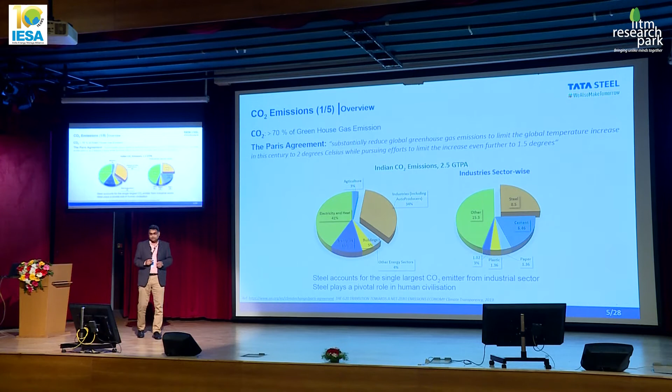So coming to the CO2 emissions, overall perspective, why it is important for the steel industry and what we are doing. Let us concentrate on this part. Overall emission from different sectors, if we see, the industrial sector is contributing 34%. Steel alone is contributing 8.5% of the overall CO2 emission globally. So you can understand, steel is the single largest CO2 emitter from the industrial sector.

No other industry is emitting as much CO2 as steel is emitting. So it is a really big volume of CO2 we are emitting. I'll show you some data of that as well. But also you have to appreciate the fact that steel is pivotal for our human civilization. We don't know any other material as omnipresent. Of course, cement is there, as omnipresent as steel as a material. So it is touching everybody's life in some way or other every day.

So we cannot get rid of steel, at least in the foreseeable future. Steel will be there, and the way the process exists, it will be producing CO2. So we need to have strong strategies around decarb steel. Before going into the details of the decarbs, let me just put these slides. This is a known slide.

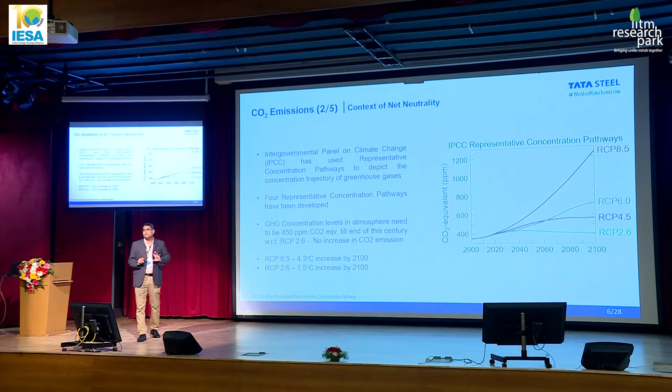Let us better concentrate on the RCP 2.6 line, this green line, which is a desired line for us, where the increase in surface temperature can be contained to 1.5 degrees or so. This line shows that the concentration of CO2 will increase, and then beyond 2040, it will actually start decreasing. So let us keep this data in mind. It is already almost at the threshold; we are almost at the 400 plus ppm level. We have few margins to cover, and then it should really reduce so that our surface is not warmed beyond 1.5 degrees centigrade.

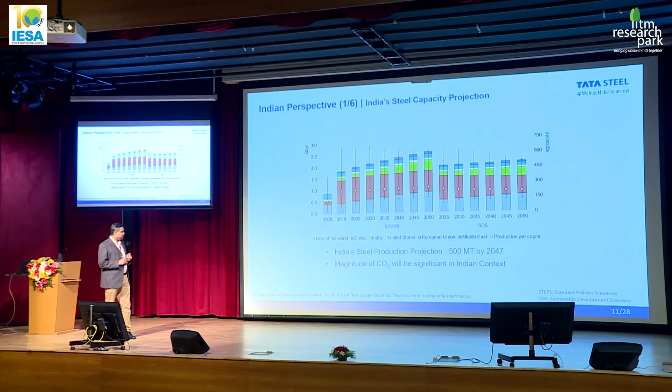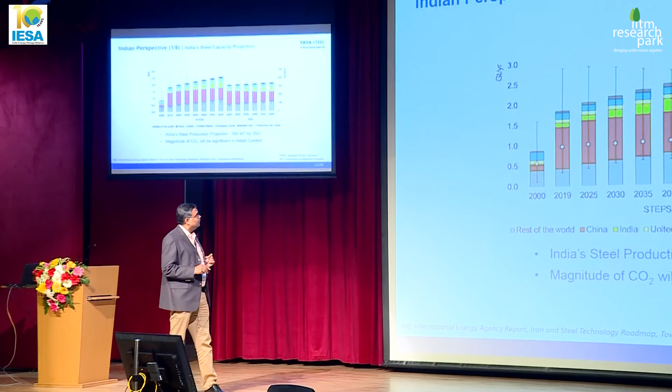Now coming to the Indian perspective, how it will look in India. I'd like to show you this prediction for the global steel demand, and these green patches are for Indian demand. There are two kinds of predictions.

One is the standard policy scenario, which is business as usual, and the other is the sustainable development scenario. In both scenarios, one thing is clear — the amount of steel produced in India will be substantially higher. It's predicted that by 2047 we'll be producing 500 million tons of steel, against our present level of about 100-110 million tons. That's fivefold more.

Given a footprint of 2.5 tons per ton of crude steel, you can imagine how much extra CO2 will be released. But at the same time, we have to comply with the Paris Agreement, and we won't be able to allow so much extra CO2 into the ambience. So our problem is a little more severe because of this inevitable increase in steel production.

Adding to this problem, this is a typical Indian situation. If we look at our available raw material, our iron ore deposits are not of very superior quality — generally very high in alumina. And alumina poses certain problems in steel making, which essentially increases fuel demand and subsequently CO2 generation.

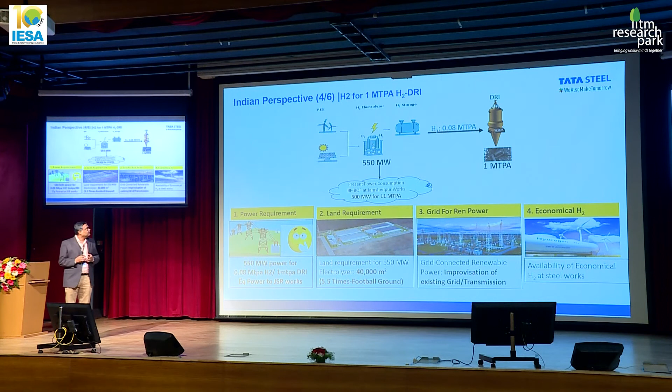So these are challenges on one side. On the other side, there's a huge opportunity for us to do research, to pilot something, and come back with breakthrough technologies that can change this scenario. On the policy boundary, we have already set our target - the Prime Minister has announced net neutrality by 2070. For steel also, we need to comply with this target.

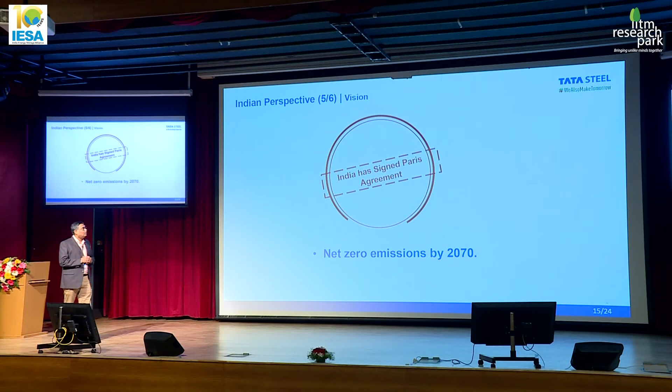We have to substantially reduce our CO2 footprint, taking the clue from the COP26 announcement by the Prime Minister. So these two things - availability of non-fossil energy and the 50% reduction of energy requirement through renewables - may be good enablers for the steel industry. But our requirement will be much more, seeing that we'll be producing around 500 million tons per annum. Of course, we can expect from this announcement some policy interventions as well, which will encourage us to adopt CCU, CCS kind of technologies.

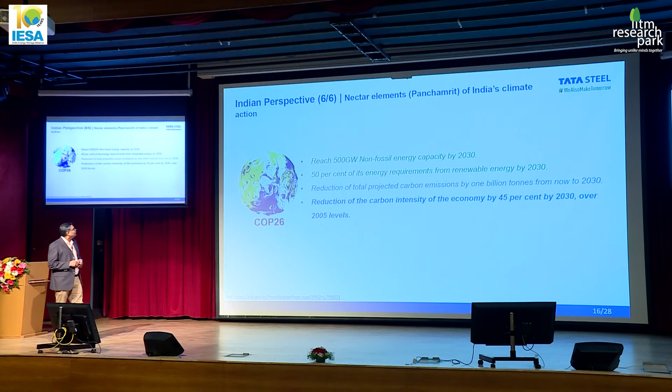So now I'm quickly giving you some of Tata Steel's efforts here, what we are doing. This is our target - we have already announced that by 2045, we'll be net neutral in our Indian operations, and by 2030, we'll be less than 1.8 tons of CO2 per ton of crude steel. This is a very, very ambitious target for any steel company of our volume with our existing plants.

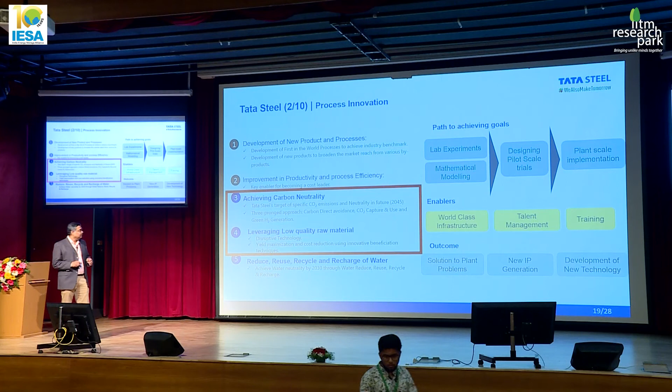So I'm now just showing you a glimpse of our research, what we are doing to achieve carbon neutrality and what we are doing in leveraging low quality raw material. I'll quickly glance through this.

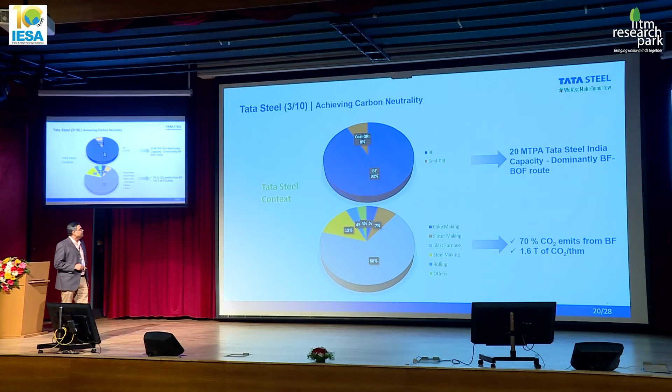In Tata Steel's context, most of our steel is produced through the blast furnace route, 92%. And if you see the amount of CO2 coming from different processes, 70% of the CO2 is coming from the blast furnace process. So our decarb effort is mostly focused around the blast furnace.

Coming to hydrogen production, globally if you see the general trend for the steel industry, hydrogen is sourced through electrolyzer, and a little bit through biomass gasification. So this is the trend. We are trying something different.

We are reconfiguring this chemical looping combustion in such a way that the BF gas from the steel mill will be used to generate hydrogen. We are almost completing this piloting as well, and we expect 15 to 20% of our hydrogen requirement will be sourced from this technology when it is available at scale.

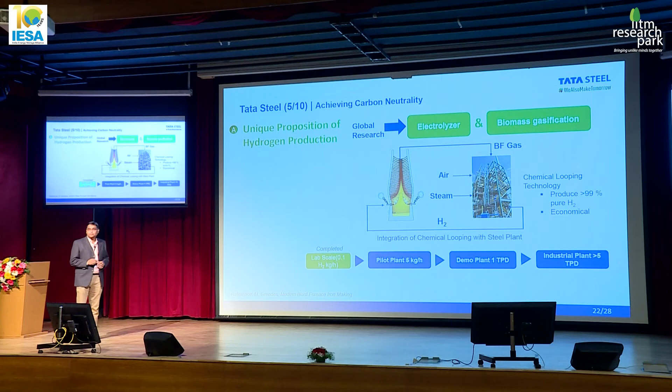The second thing we are piloting is for syngas generation. I'm just skipping it for paucity of time.

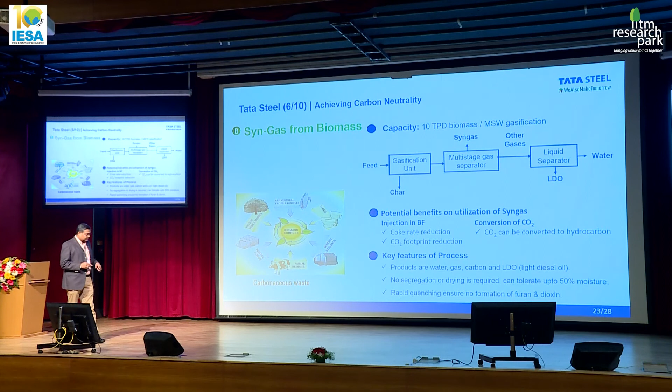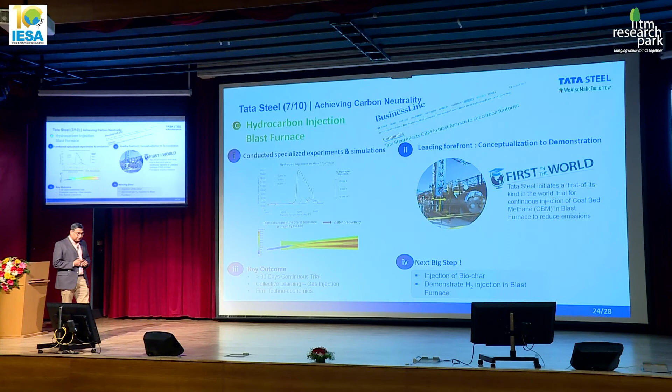This is one good thing - in a blast furnace, if you can get rid of carbon as a reductant. So what we are trying here is injecting hydrocarbons through the bottom part of the furnace, as natural gas or coke oven gas or even pure hydrogen, so that part of the carbon can be replaced. We have done extensive lab scale studies, and then injected coal bed methane into one of our blast furnaces, running a one month trial. This is the first time in the world that coal bed methane has been used for injection in a blast furnace.

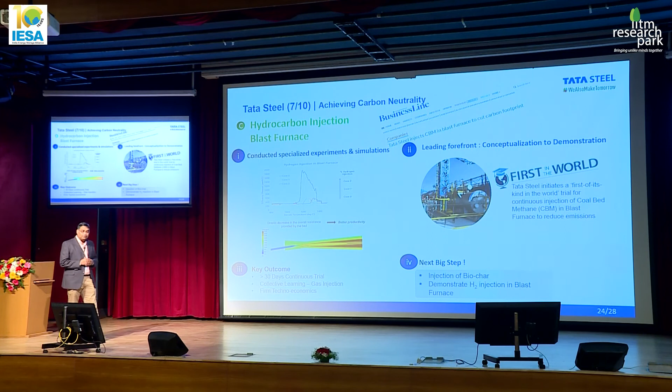We are also preparing our furnace to inject biochar, which is a carbon neutral, CO2 neutral carbon source, and we'll also be demonstrating hydrogen injection in the blast furnace this year.

As a piloting example from us, we have successfully piloted 5 tons per day of CO2 capturing, taking the blast furnace gas as an input.

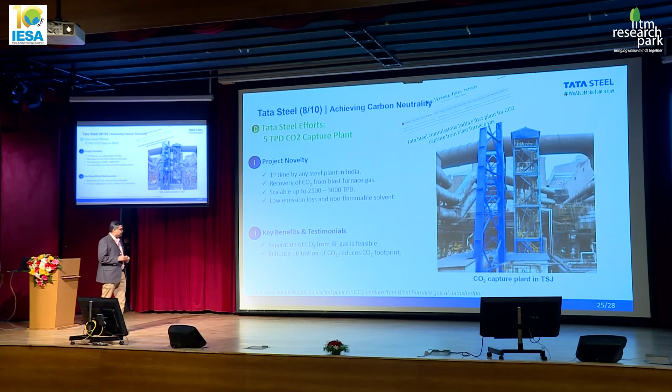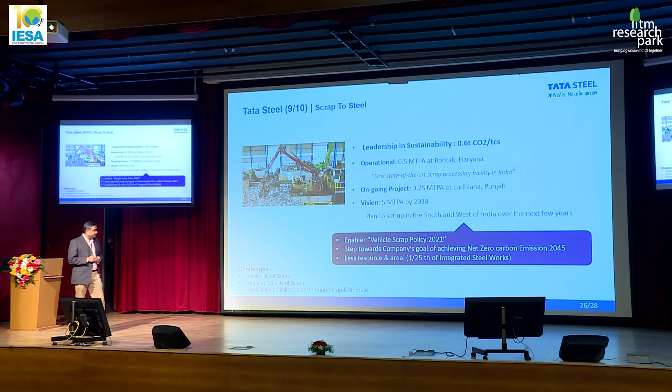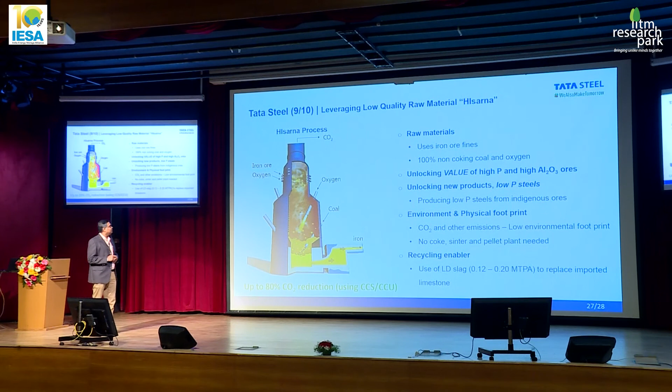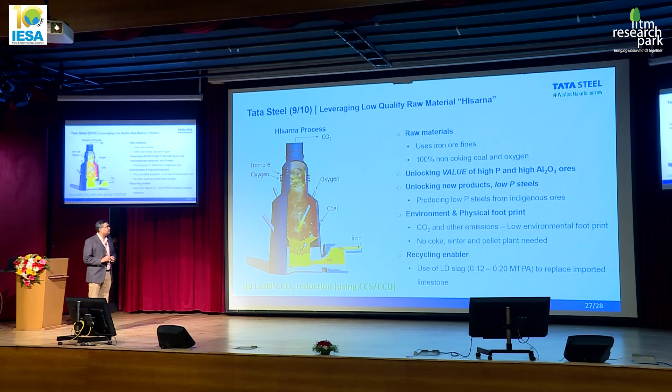This is a flagship iron making process, we have successfully piloted it now and will soon commercialize it. We call it HIsarna. I will not go into the details of the process, but the key point is that it can take very low quality iron ore. You don't need any coking coal, and at scale, once the CCS technology is successful, the carbon footprint will be 80% less than the blast furnace. So we'll soon be putting up some commercial plants here in India.

I'll not explain any more. I'll just try to finish my talk by saying this: our destination is known, we have to be carbon neutral by 2070. In Tata Steel's context, we have to be carbon neutral by 2045. But the path is unknown - we seriously do not know which path we will be following to achieve that. So if not anything, our journey will be very exciting. We have miles to go. By saying this, I will stop.